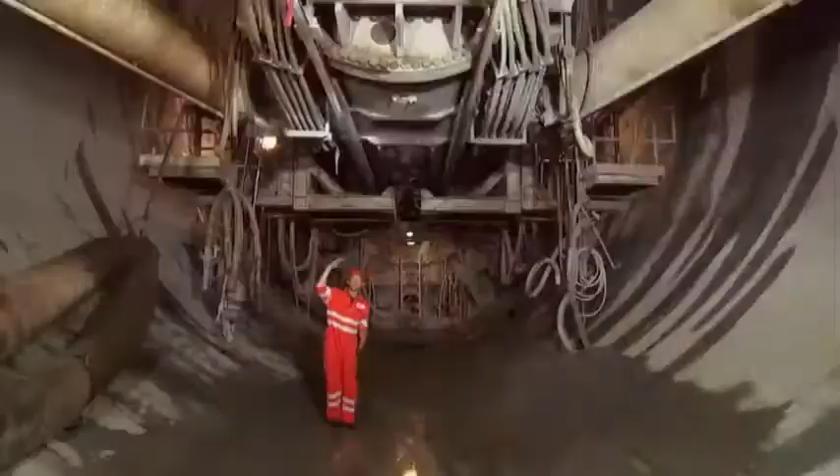Two teams are working through one of the most dangerous geological zones on the planet. If you encounter some bad geology halfway through, it's not like you can go around it. No, you have to go right through. On the one hand, tunneling with one of the biggest machines ever built. A 30-foot tall drill bit that is mining right through the earth.

And on the other, blasting through 7,000 tons of rock each day. All right, so the charge is in, and we're gonna blow the crap out of this wall. After 12 years and 34 miles of digging, they're just 4 months away from the final breakthrough, revolutionizing transit through the Alps forever.

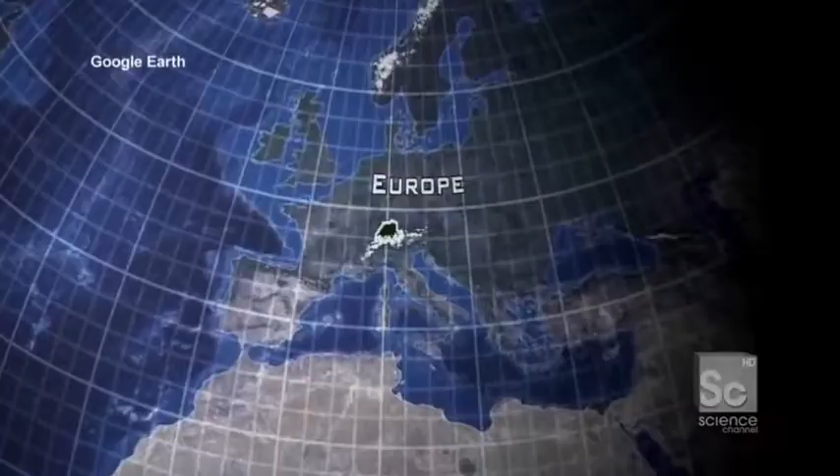I'm in Switzerland, famous for its handcrafted timepieces, milk chocolate, and political neutrality. But more importantly, Switzerland is the geographic epicenter of Western Europe. 2/3 of all freight sent between Northern Europe and Italy is transported through this tiny country, just half the size of the state of Maine. But despite its convenient location, Switzerland is a geological anomaly.

Over 65% of the entire country is covered by the second largest mountain range in the world, the Alps. With soaring peaks over 15,000 feet high, the Alps form a 700-mile-long barrier between northern and southern Europe. And at present, the only way to get from one side of the country to the other is up and over the mountains.

To scale the Alps today, trains climb over 5,000 vertical feet, slowly weaving through sharp curves at just 40 miles an hour, a quarter of their top speed. This steep route also forces trains to operate at half their capacity, despite freight demands growing by 75% each year. With Switzerland becoming the economic conduit between northern and southern Europe, there was an absolute need to find a way to not go over the mountains, but right through them.

Switzerland has launched the most ambitious tunneling project ever attempted, 6,000 feet under the Alps. The Gotthard Base Tunnel will be the longest in the world, stretching 36 miles from one side of the Alps to the other, more than 4 miles longer than the Chunnel connecting England to France.

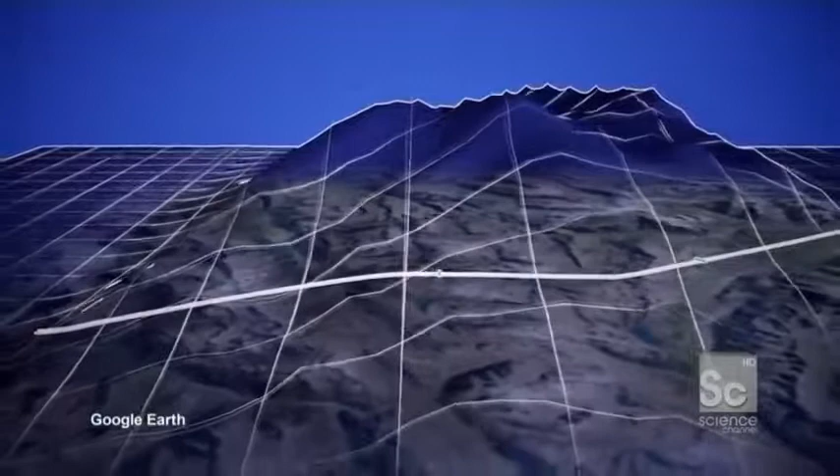When complete, the tunnel will consist of 2 parallel tubes, each 30 feet in diameter. Soon, high-speed trains will cut straight under the base of the Alps for the first time ever, doubling the current freight capacity and dramatically changing transportation through Europe.

I mean, it's more than just making freight move more quickly. Exactly. Alps and mountains are part of the Swiss identity, but it's something that blocks us from the south. And for centuries, people have looked to have a fast way through the Alps. And it's not only about transportation, it's also a cultural exchange.

It brings regions together. To build this revolutionary route, 2,000 workers have excavated 24 million tons of material, enough to build the Great Pyramid in Egypt 5 times over. After 12 years and 34 miles of digging, the tunneling teams have just 2 miles left to go. They'll meet up under the deepest part of the Alps, 6,000 feet below the surface.

And today we're headed 17 miles from the southern entrance, where one team has encountered some of the hardest rock on Earth. Now we're about to begin a 45-minute journey in that train, deep into the tunnel, to the very active edge of where the tunneling is happening. It's kind of freaky, really. Okay. And we're off.

Tell me about where we are in the tunnel relative to where we are in the mountain. We're now basically under the main ridge of the Alps. The pressure from the mountain overhead creates one of the toughest rocks in the world, granite. 6 times harder than concrete, it's what's slowing down the tunneling team.

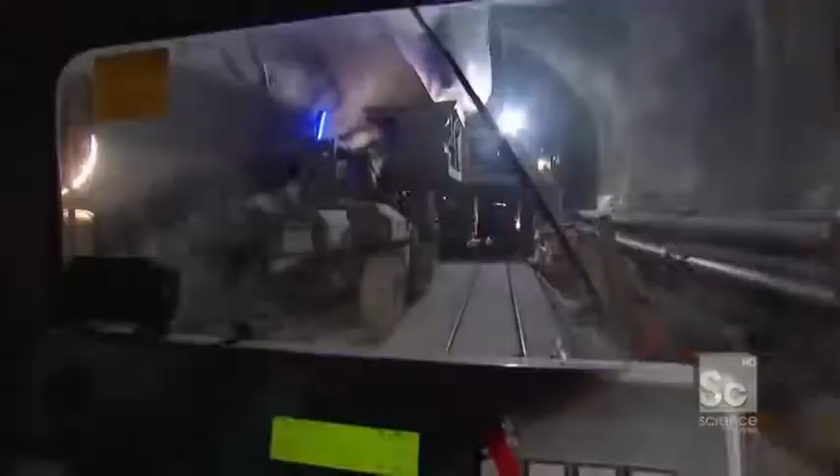No, I mean, we never know where we're going. We're like astronauts. We're putting our foot every day on a rock where no one has ever been before. Well, after about a 45-minute train ride, it's time to go to work. All right, we're here.

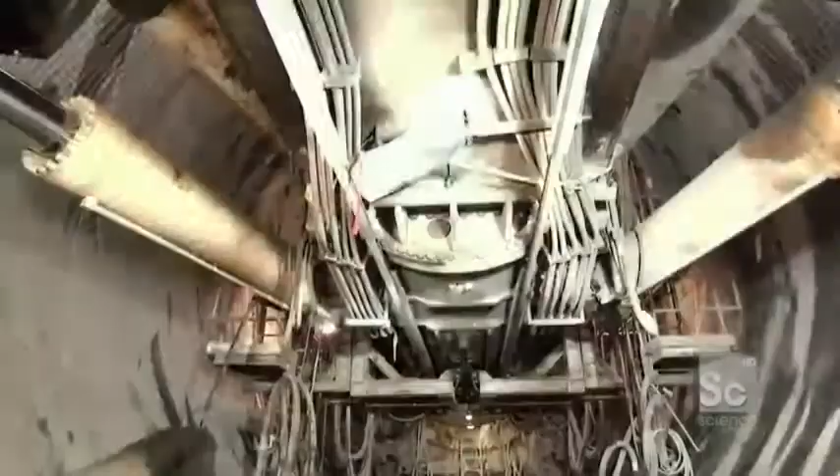So although it's a little bit hard to tell, although it looks like I'm on some big metal rig, this is the TBM. This is the tunnel boring machine. This thing is 1,200 feet long from the back to the front. And essentially, this is what it's all about. A 30-foot tall drill bit that is mining right through the earth.

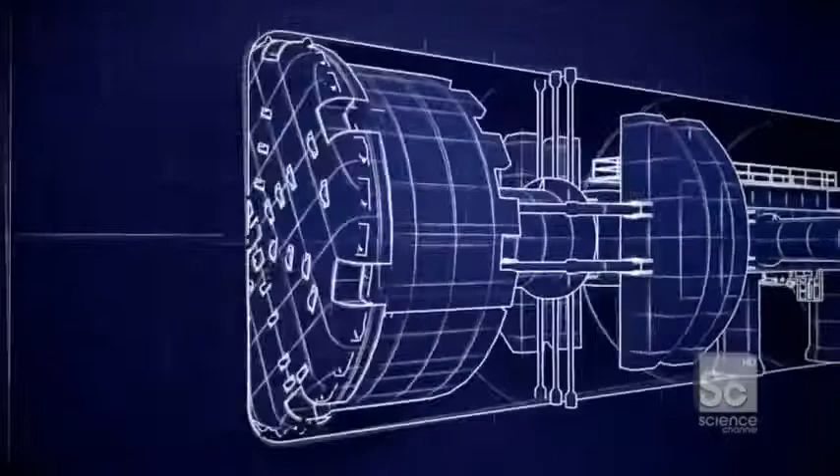One of the biggest machines on the planet, the TBM is a 3,000-ton drill as long as 4 football fields. It bores through the mountain with a 30-foot tall rotating cutter head that pushes against the tunnel face, crushing the rock, advancing the tunnel an average of 90 feet a day.

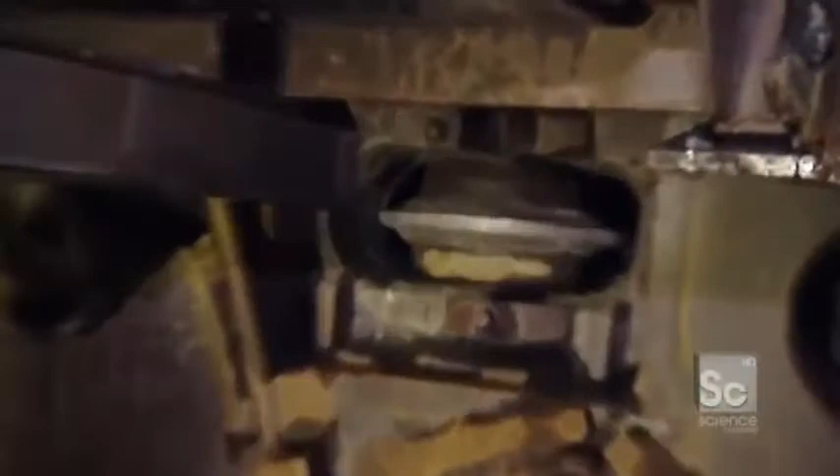All right, so now I'm actually inside the chamber, directly behind the cutter head. And if you look right over here, those are the cutters. Those are the actual rotating devices that are making contact, physical contact, with the front of the tunnel. The 66 disc cutters located at the front of this TBM shear off more than 7,000 tons of rock each day. They've been boring through the granite for 18 hours straight, and they've become worn down.

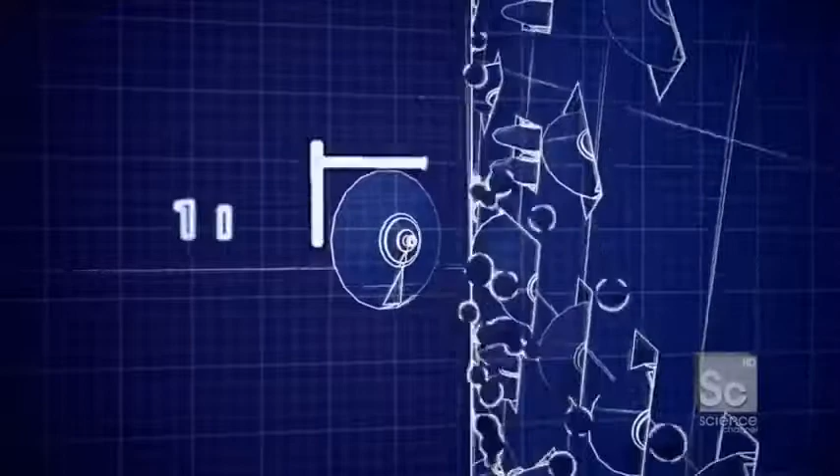Now, if the sharp edges are worn more than an inch without being changed, it can slow the TBM from a maximum of 120 feet a day to just 9. The crew has to repair this battered cutter head before they can continue drilling. The question is, have they been worn out? Do they need to be replaced? And the man who can figure that out is Martin.

Martin, give me some screen. Martin is from Germany, does not speak a lot of English, but we're gonna make this happen because we're both now 6,000 feet under the Alps. There's not really a lot of time to try and have a cultural exchange. So, this is our machine here.

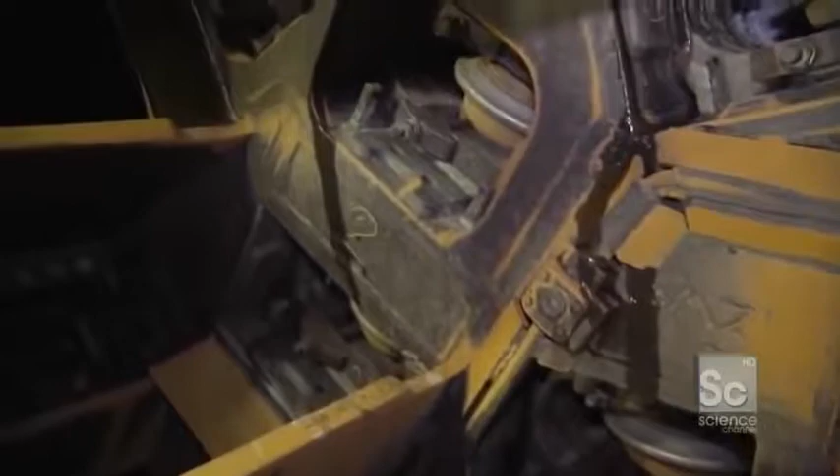Martin uses a specially designed caliper to measure how much of the cutter has been eaten away. If the reading is more than 25 millimeters, then the cutter's been worn down too much and has to be replaced. Myself and Martin are gonna climb into the cutter head, 30 feet tall, measure all 66 cutters, and find out what has to go, what can stay to get this machine back to mining. Not much below me. Good.

All right. The cutter head is as tall as a 3-story building, pushing through the granite with 26 tons of force. Look at him down there. The cutters wear down after less than 12 hours of drilling, 10 times faster than in softer rock.

I'm going in to help, Martin. Stay there, Martin, don't you worry. 16.3. Martin, how are you? Fine. You're good?

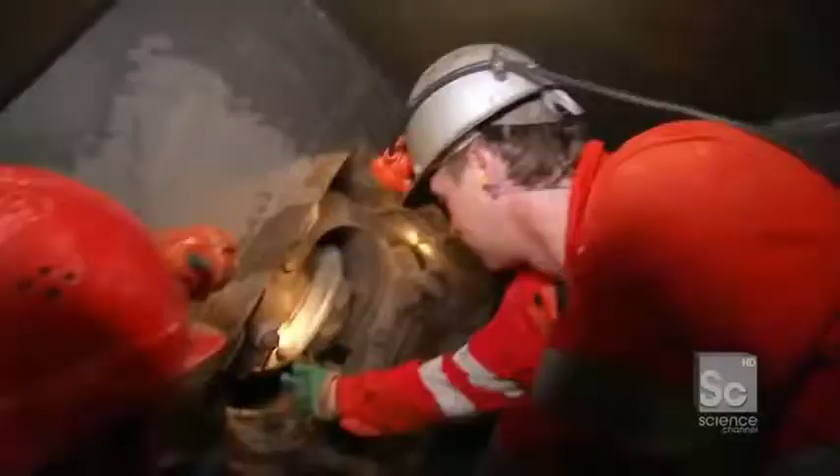We're now in the bottom of the cutter head. I'm actually at the very underside of this 30-foot disc. And what we're here to check out is right there. There's the cutter right there, Martin. So let's measure this cutter head. All right, so now look, as the caliper extends, this is the whole point here. We look at that number, it's 18.3 millimeters, which means this cutter of the 66 can remain. Onto the next cutter. How much? 4.8. 4.81, so we like that.

That one's good. Next. 7.1. 7.1. Also an opportunity for joy. This one's okay. It's pretty good though. 7 is good. Happy. This 20, good. Very good. I guess really when you're dealing with 66 different cutter heads, it's hard to get excited after each and every one. After measuring, we found that 3 of the cutters need to be replaced before the TBM can get back to work.

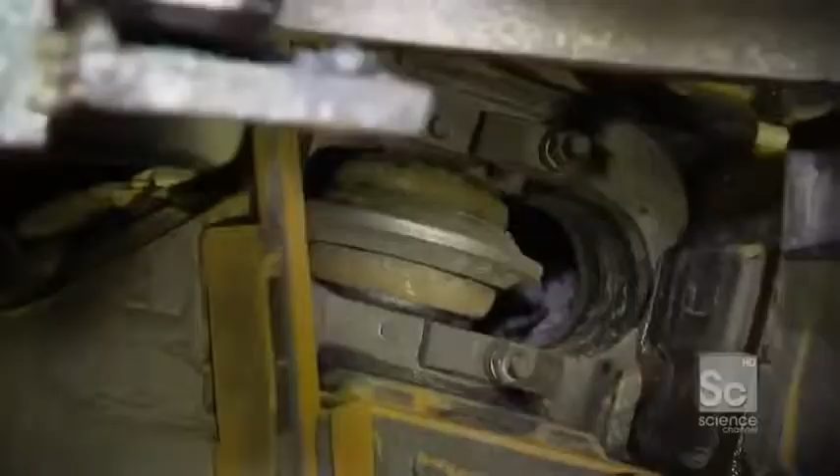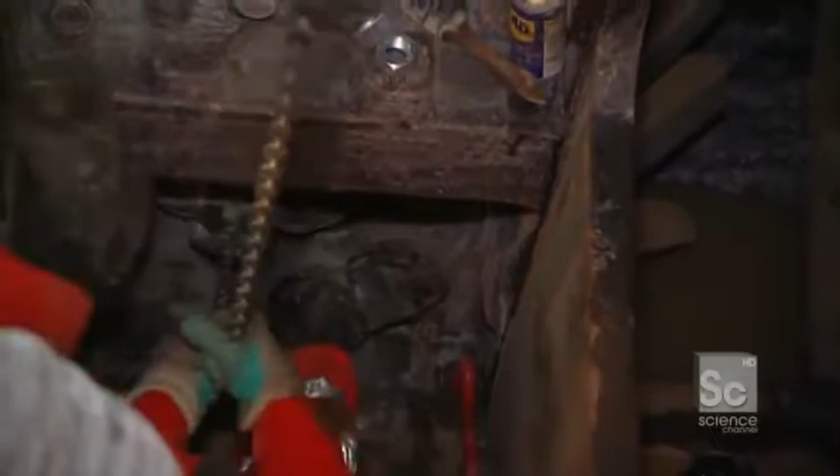So essentially what Martin's doing right now is taking out the old cutter head. Here it is. There it is, he's got it. There goes the old cutter. Over the course of the project, Martin has replaced more than 10,000 cutters. Each one is made of 300 pounds of solid steel, so the crew uses a hydraulic crane to maneuver them into position.

All right, and so this right here is the cutter. You'll notice the steel is at its full length. So this is the new stuff. Gotta get the old stuff out. It's basically like changing a tire. A very heavy tire. You know what I mean? So we swapped the old one out. Next step is bringing the new one.

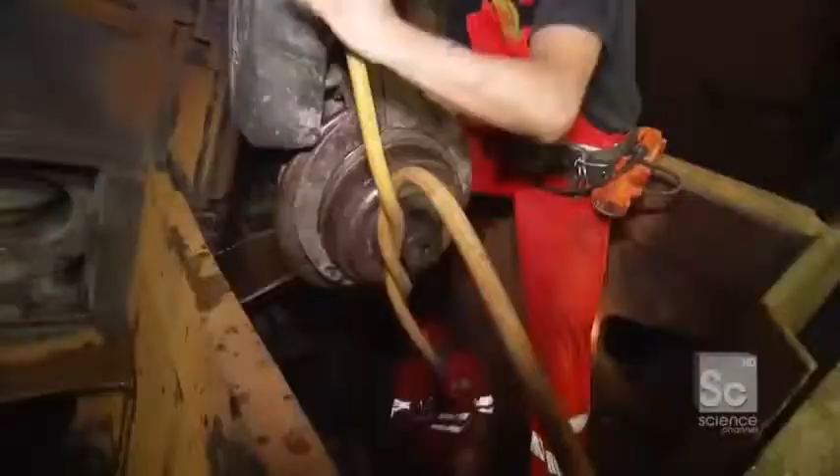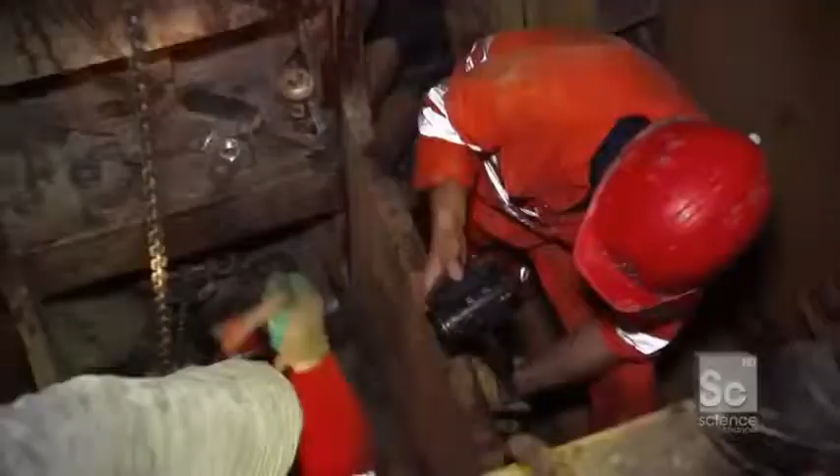And now it's about getting it to fit in the hole, which seems to involve Martin's feet. There it is. Nice. So he's generally gotten into place. He's now using a pry bar to wedge it over. The cutter is specifically designed with just 2 bolts for fast installation, even in awkward locations.

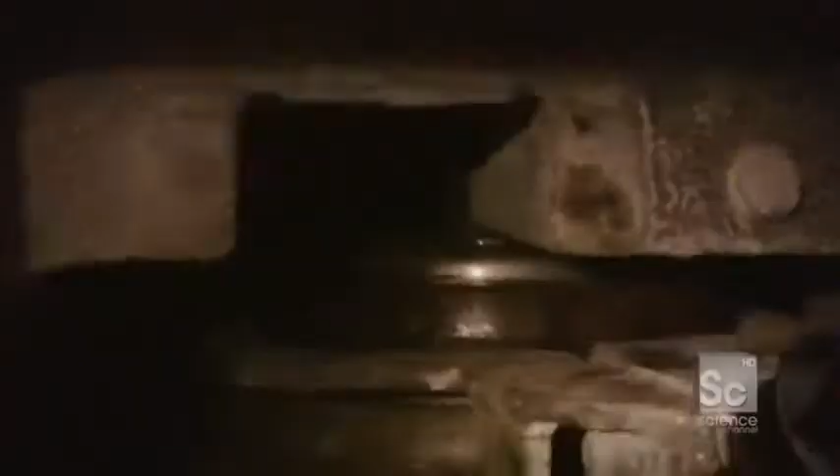Now Martin's shooting. Martin is now fully actually making the show by himself. Nice. Martin's now photographing his own work. Pretty good stuff. Martin, as far as I'm concerned, you shoot it, and then I'll do all the work.

It's incredible that there's 66 of these things, and you can imagine they're getting worn down constantly. And this is what it takes to just change out one cutter in one unfortunately inconvenient location. All right, so the old one was taken out. Yeah? The new one is in. Finished? That's finished. You did good. You did good. You're a fast man.

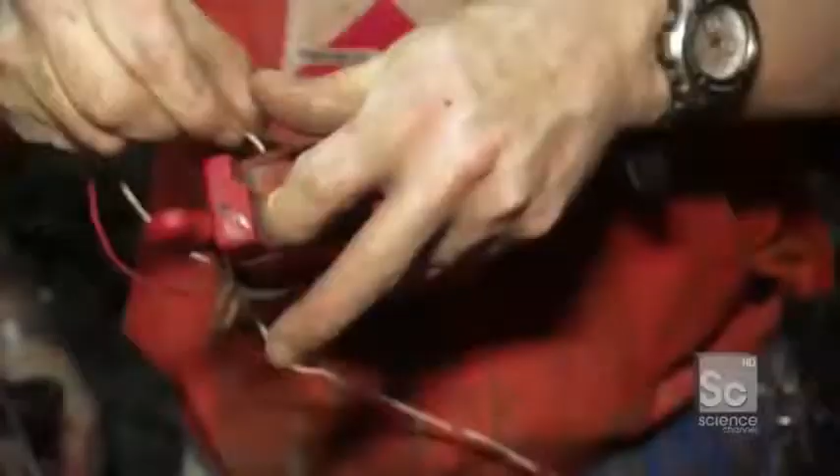And now, thanks to his nimble hands and sort of perspicacity, this cutter head is ready to get back to work and start building this tunnel again. Coming up, using 1,000 pounds of explosives. This is like full on, should I cut the red wire or the white wire situation? to blast through one of the toughest mountains on Earth.

The Swiss are known for being incredibly precise. Whether it's their handcrafted timepieces or their famous train system, which, by the way, I can personally tell you, departs and arrives exactly when they say it will. And they're going to need that level of accuracy because the tunnel they're building is not just the longest in the world, but it also has to accommodate some of the fastest trains ever built.

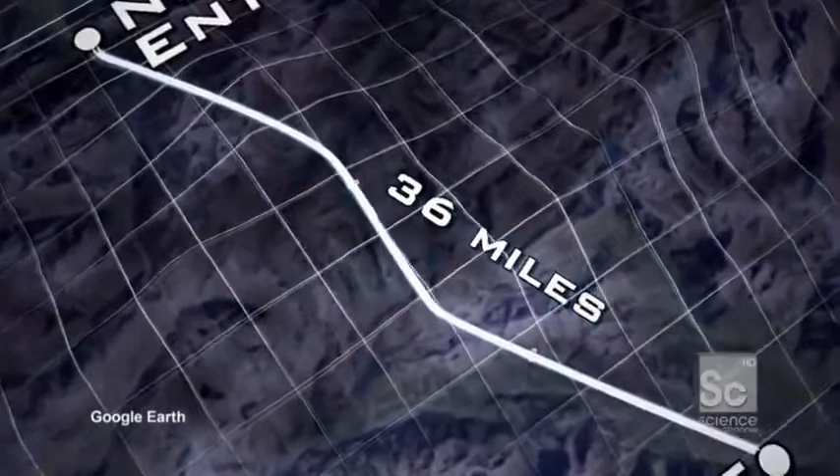Trains will pass through the Gotthard Tunnel at over 150 miles an hour. And at these speeds, even slight curves could cause a derailment. For tunneling teams on either side, this means digging a direct route through 36 miles of rock and meeting at an exact point 6,000 feet under the Alps. I mean, how accurate do you need to be? We have a tolerance of 12 centimeters, which is this much, that we can use to meet.

It's like a bow and an arrow, and you don't see the target, but you still have to be right in the target, right in the middle point. It's incredibly close, and you're shooting an arrow essentially blindly over a trajectory of miles. Well, it's about 1.5 miles still left, yes. And what I find to be so amazing is that you have a set beginning point, you have a set end point. If you encounter some bad geology halfway through, it's not like you can go around it. No, you have to go right through, and that's the main goal of this tunnel. You cannot change the geology.

Ideally, 2 tunnel boring machines would work towards each other, meeting in the middle. But on the north end of the tunnel, the drilling team has hit a patch of soft rock with fault lines. If they bore straight through, it could crush the TBM. So they had to resort to an older method of tunneling. So of the 36-mile-long tunnel, 90% of it is drilled by using a TBM, a tunnel boring machine, that can bore through as much as 75 feet each and every day. But for the area where I'm standing in right now, this 10% section, there are so many fault lines, it's too dangerous to use a TBM. So instead, they're taking it old school and drilling and blasting.

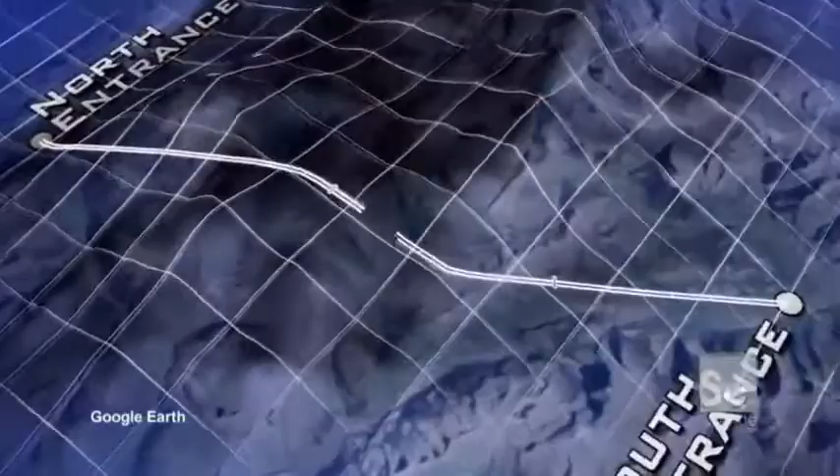Blasting away the rock is 10 times slower than using the TBM, but it's the only solution that'll work in this volatile area. The mountain's enormous pressure creates a squeezing effect, shrinking the tunnel's diameter by almost 3 feet, making it too small for future trains. Now, to prevent this, they're blasting a 3-foot wider diameter tunnel, allowing the rock to naturally squeeze down to the right size, matching the other side.

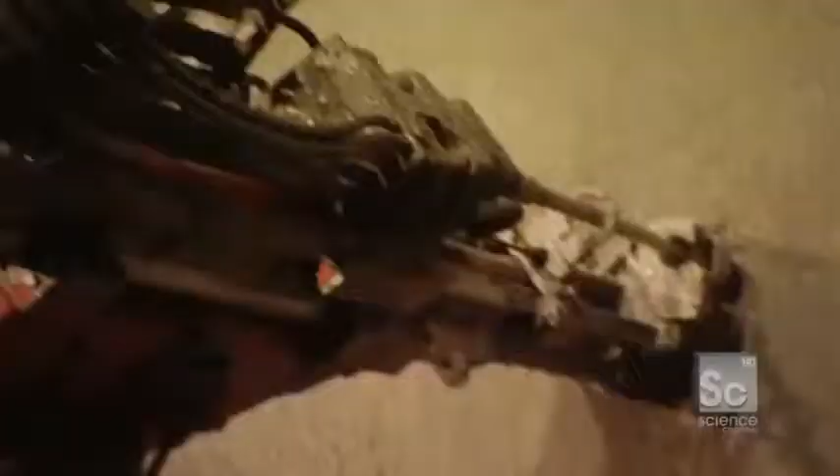So this thing is called a 3-boom Tamrock. Essentially, 3 different drill bits that can put as many as 120 holes into that wall. These holes are filled with ammonium nitrate, a liquid explosive that blasts away the rock, advancing the tunnel 9 feet at a time. Coming up.

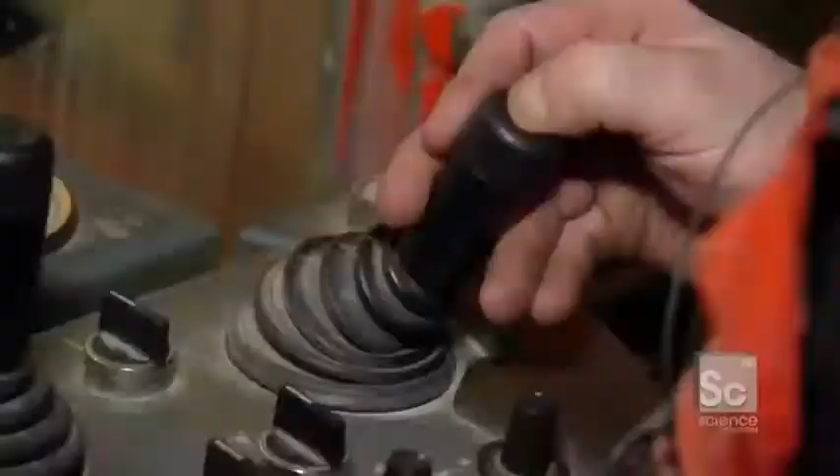Okay, so now I'm inside the cab of the 3-boom Tamrock, and it's this thing and this man right here, they're actually driving this thing and supporting this rock bit. How are you doing? You're smoking. That's good.

We're in a confined space in a tunnel with very little air, so... You do? Yeah, you're both smoking.

So actually, if you look here at the computer screen, it sort of sums up what we're up to. This is a cross-section of the tunnel right in front of us, and the goal is to locate 120 holes on this space and drill those holes, filling each one with explosives so we can push that wall out

and grow the tunnel. Are you smoking back there? This guy loves to smoke.

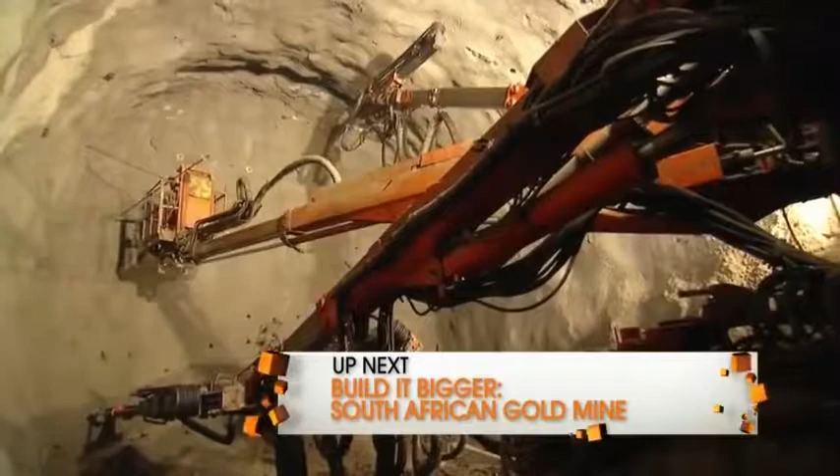To precisely control the diameter of the tunnel, a surveyor pinpoints the location of each hole within an inch, evenly distributing them across the rock face. All right, so at this point, we're almost done. Almost all of the 120 holes have been drilled, and the next step is to load them, or in other words, fill them with liquid explosives.

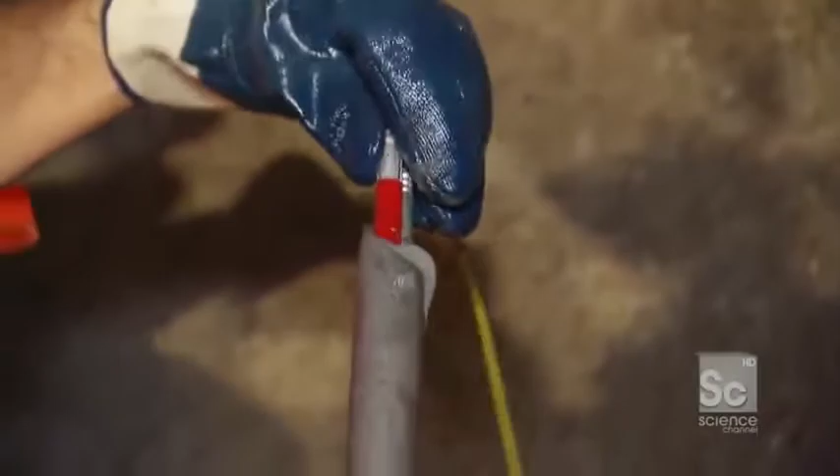So you can see the charge right here, right? It's essentially a small little bomb in my hand, and I'm going to stick this in the very tip of my hole, right? We're actually going to shoot this hole with the liquid explosives and push this charge into the very back. Therefore, when the blast goes off, this charge will actually accelerate the blast, loosen more rock, and get us those 9 feet we need.

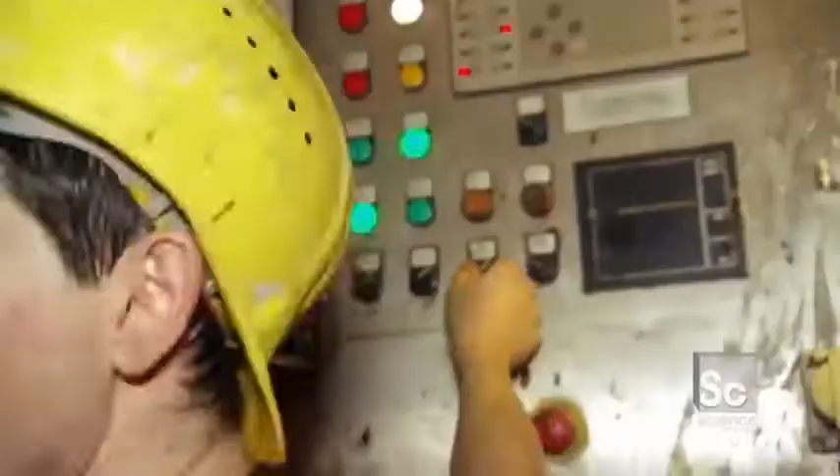Okay, ready? The charge, the tip of my spear. Push it in, push it in. Get it in. I'm in, 9 feet, I'm in. Bring in the juice, and now, right now, he flips the switch. Switch is flipped. Now, in this hole, look at that. There she is. All right, so the charge is in. We're gonna blow the crap out of this wall. Keep going, all right, okay, here we go.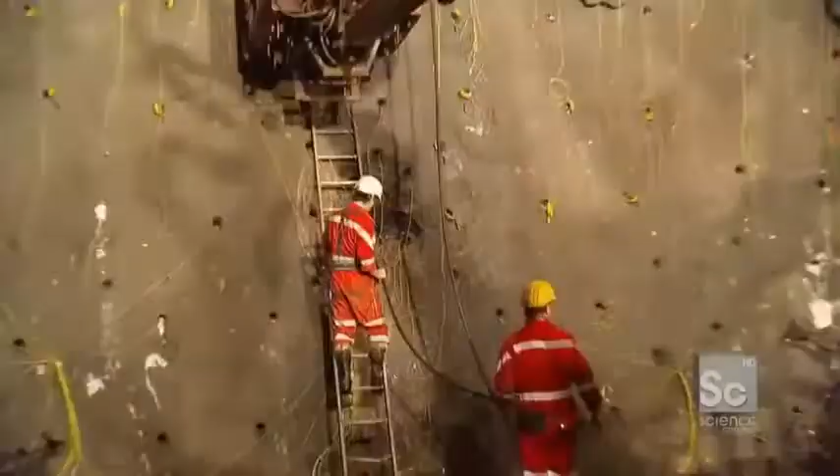The charges are tied together and timed within milliseconds for maximum control, starting at the center and radiating out. The last charges to explode are at the bottom of the face, loosening up the pile of debris, making it easier to remove.

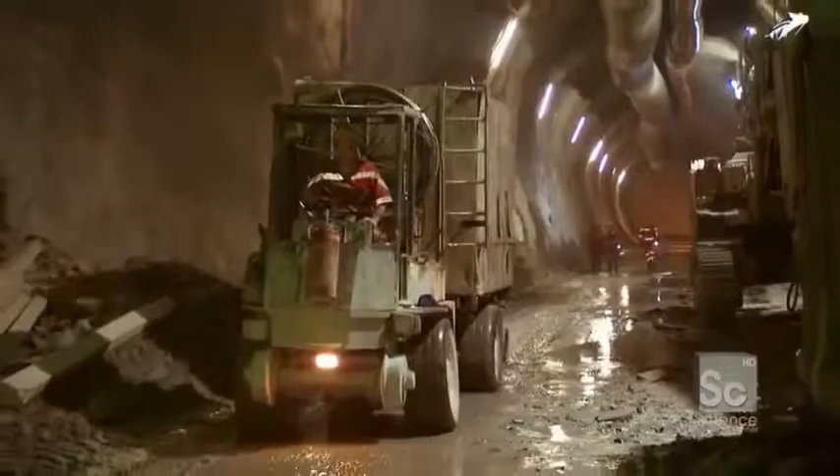The last thing to do is to take, if you look right here, the fuse that's connected to every single one of the holes, connect that to this right here, all the explosives getting tied together with this last piece of, well, yellow electrical tape. You would have thought it a little bit more sophisticated at this point, but that's it. With the fuse connected, the explosives are live. The team retreats 900 feet up the tunnel to clear the blast radius.

When the multi-million-dollar equipment starts to get backed out of the way, you know it's time to go, so we're there. All the holes are filled, charges are connected, we are done, everyone's evacuating. We're ready to blow this thing up. All right, so we're gonna hide behind this steel container right here. Now, there should be enough protection, but I want to make this clear. The blast is happening right over there in a straight line.

Okay, that's it down there. That's the end of the wall. So we're not around a corner. We're not hiding far away. There are just over 100 blasts to go before the tunnel is done. And the honor of setting them off goes to the construction company's largest shareholders.

And as we speak, in his hand are the 2 wires that came all the way from that wall, physically dragged all the way there, right? He's got the wires there. He's tying them into the detonator, one to the next. This is like full-on, should I cut the red wire or the white wire situation. There's about 14 different people from the company to my left here.

Wow. Grande. Well, there they go. Apparently what's required to set off the blast here is that you have to have a substantial amount of stock in the company. I have none, so I didn't get to blow it up. He did a fantastic job. The blast went off, all is well. Potentially the rock wall has been pushed back 9 feet, and I'm gonna start buying stock in this company, so in a couple of years, if I stay focused, I too can blow something up.

The blast puts off superheated ammonia gas. So we have to wait 30 minutes for it to clear before we can check the damage. There's still a lot of residue in the air, so your eyes do burn. Even with the gas mask, it's really hard to breathe. You can feel the ammonia in the air. Well, what do you think? Tip-top. Tip-top. Good? The man is happy. It'll take the remainder of the day to shuttle all 6,000 tons of debris 5 miles out of the tunnel.

Well, look at this. Where I'm standing right here, 15 minutes ago, was a solid wall of tunnel. And now, I'm standing on the residue. The tunnel has been pushed back by 9 additional feet. And they're going to spend the rest of the day pulling out the muck and getting ready for the next blast.

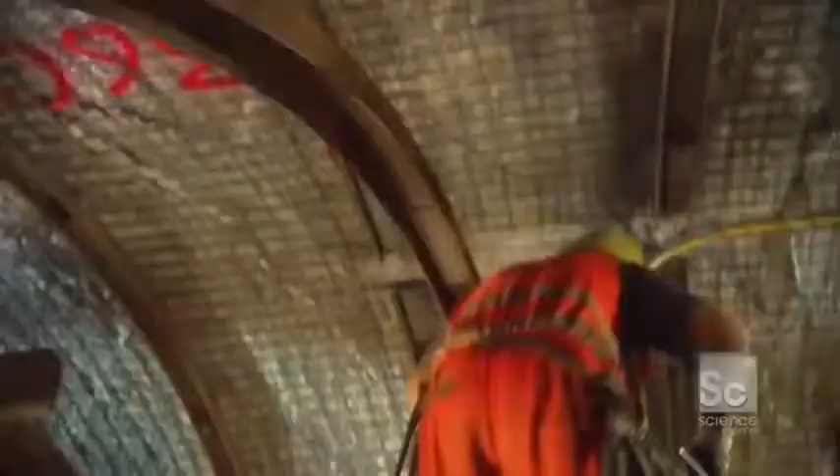Coming up, preventing a catastrophic cave-in with a one-of-a-kind technology. Yeah, it can collapse and fall down, and that's a great problem. That's a big problem. Yeah.

So I'm now driving through the Swiss Alps, one of the largest mountain ranges in the world. And it's complicated. I'm climbing over 5,000 vertical feet, and to do that, you have to negotiate these incredible curves, one hairpin turn after the next. For more than 800 years, people have been searching for a faster route through the Alps, but it just wasn't possible until now. Because to build a tunnel straight through these mountains, engineers had to overcome some of the most complex geological conditions in the world.

Generally speaking, land masses are formed by a series of earthen deposits, one on top of the next, for millions of years. This creates a horizontal stratification of layers. Now, as you can imagine, this is great for tunneling. The TBM goes in on one side and has the same consistent rock type all the way through the tunnel. However, here in Switzerland, things happened a bit differently.

When the tectonic plates made contact, they actually folded upwards, creating a series of vertical stratifications, which make an amazing mountain range, but also make a lot of different geological types. So when the TBM goes into the mountain, it hits one type, and then a second type, and a third, and a fourth, and a fifth. Multiple different problems requiring multiple different solutions.

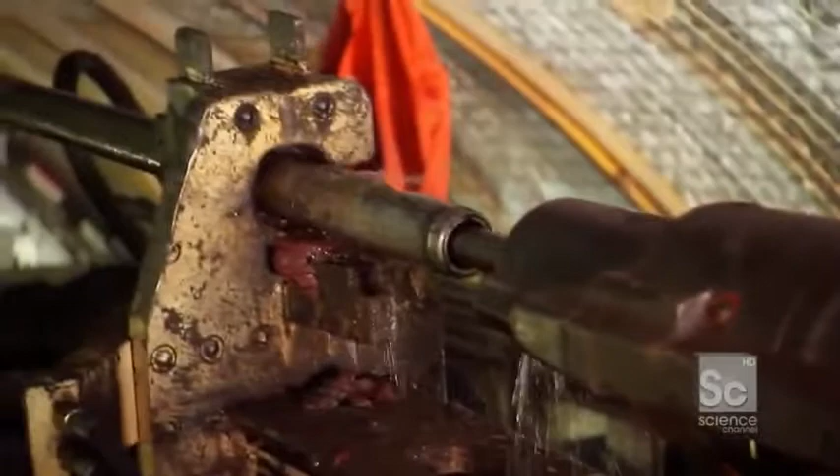The drill literally feels its way through the rock 360 feet in front of the TBM to find out if it's hard or soft. If the rock is too soft, there's a high chance it can cave in while drilling, burying the $30 million TBM and the men working on it thousands of feet below the Alps. So for example, if the drill steel goes right into the rock very quickly, you know it's soft. Exactly. But if the drill steel has to fight its way through, you know it's very hard. Yes.

Yes, we stay also here with our eyes of geologists, not only with digital data, to look at the rods, how they behave. You have to actually see, feel, understand the rock. Yes. Because in reality, you're still working blind. I mean, you never actually see the rock, only the way in which things interact with the rock. Exactly. It's easier today to look at the surface of the moon than to know exactly what we have 10 meters inside this rock mass.

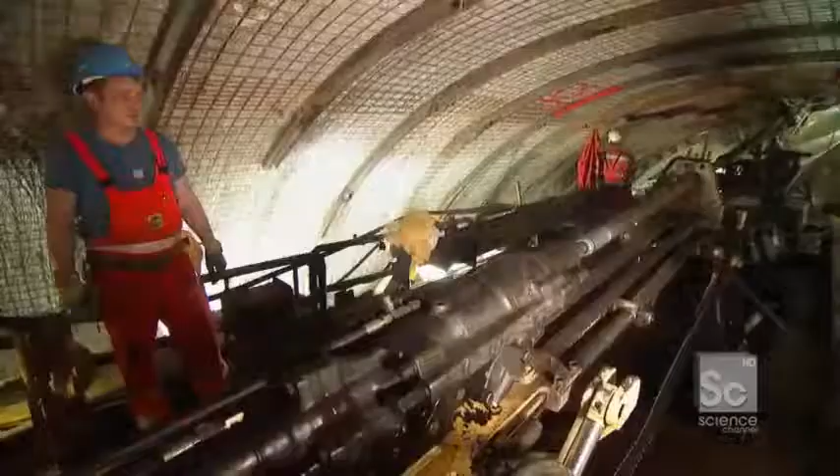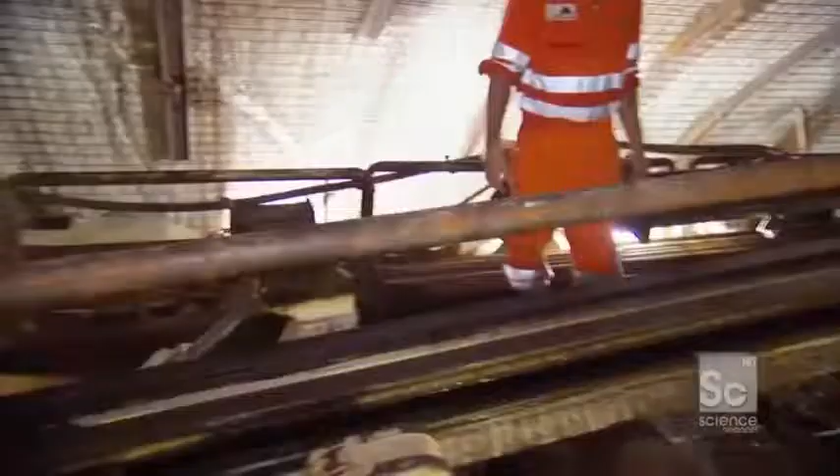To probe 360 feet into solid rock, the drill is made up of 36 10-foot-long sections joined end to end. So as you can see, what we're going to do is clasp that on, tighten it up, lock it in. So in doing so, we've added a new piece of steel, creating one long 360-foot probing stick that tells us what's happening out in front of the TBM.

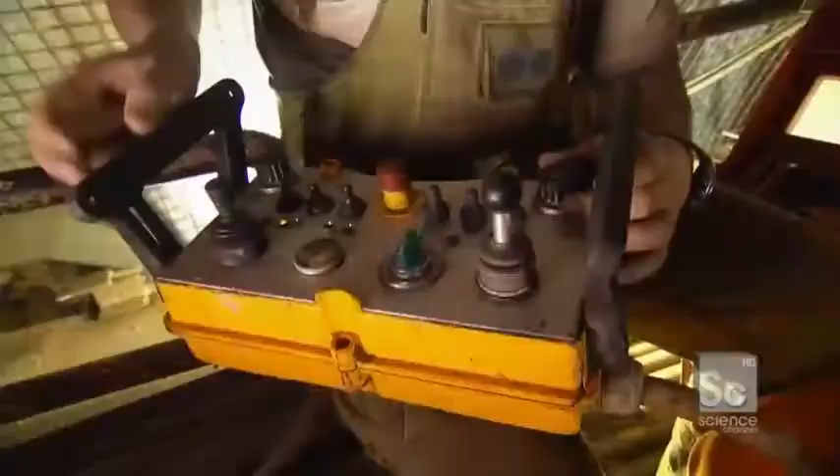So the man who's actually controlling the drill and the force he applies to each subsequent piece of steel is right here. Ralph. Guten Tag. Guten Tag. I'm Danny. Oh, yeah. Nice to meet you. My English is bad, sorry. My German is terrible. Okay. I started and you... Perfect.

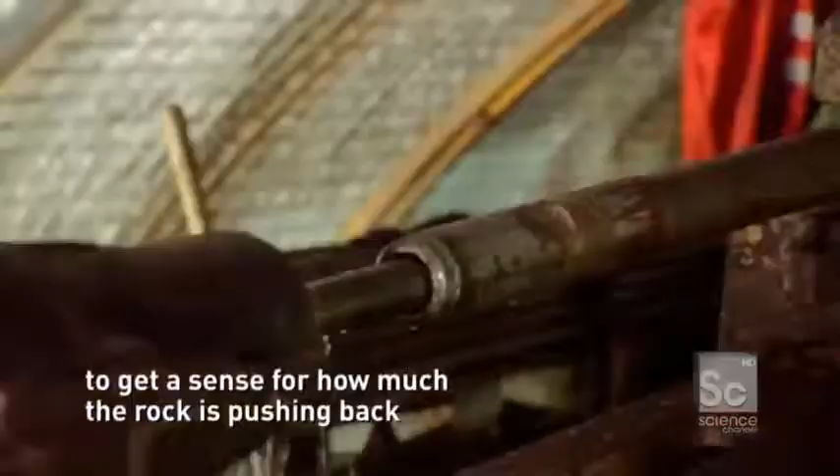So Ralph just turned the drill on. He's going really slowly right now to get a sense for how much the rock is pushing back. As he takes his readings, he slowly increases the power. Or lets me drive. A computer records how much force it takes for the drill to cut through the rock, giving geologists a sense of what's in front of the TBM.

About 100 feet in, the drill hit good, hard granite, but it also revealed that the first 100 feet were much softer than expected. If it's too dangerous to drill through, they'll have to stop the TBM and manually blast through the danger zone, adding 5 months and $10 million to the schedule.

So tell me about what was discovered during the exploratory drilling. Yeah, through the drilling, we find out some very, very soft material. And so now we're very nervous of the situation. If this were soft rock, what could happen? Yeah, it can collapse and fall down, and that's a great problem. That's a big problem. Yeah.

To find out if the TBM can safely move through this soft rock, geologists are doing a rare secondary exploration using an endoscopic camera to peer into the mountain. And you don't do this very often. No, but in the moment we have a very special situation, so we use this camera thing. It's just the second time or third time ever. And so what do you hope to see by putting the camera in there? We hope to see just a small band of the soft thing, so that would be good, but we don't know.

Same thing, yeah. The camera shows the physical structure of the rock, information the drilling can't provide. So this is it right here. So now that's amazing. So essentially, they have an endoscopic camera attached to the end of this blue thing, and they're going to stick this camera in a pre-drilled hole about 150 feet out that will tell them exactly, by eye, what is happening in the rock. And I've always wanted to do this.

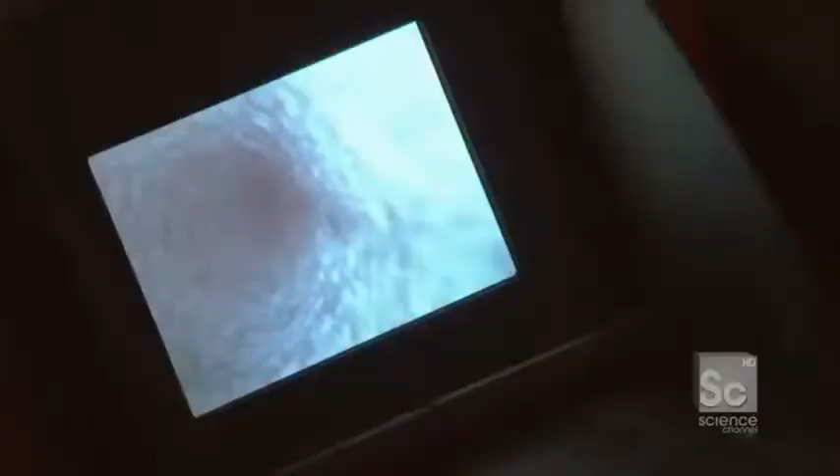Geologists look at the pattern and colors of the rock for clues about its structural integrity. If you look at that screen right now, what you're able to see is exactly what geological condition we're going to experience 150 feet in front of where we are right now. This is like that scene in Star Wars when the monster came out at the...

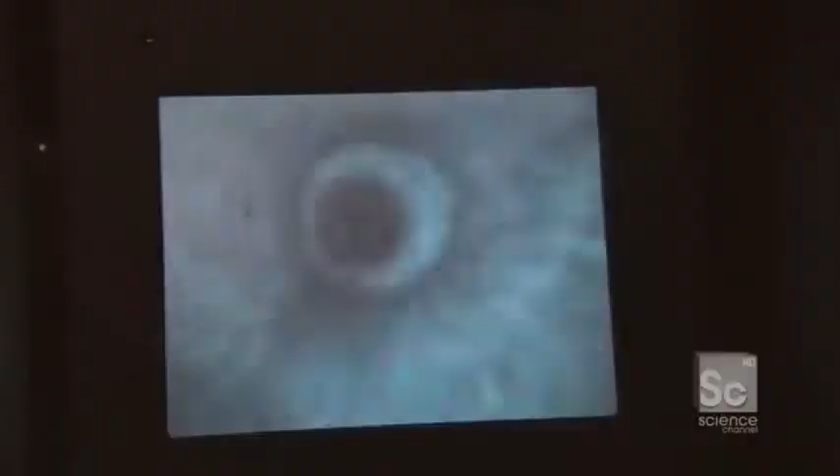That's amazing. So when you look at this image, as a geologist, what are you taking away from that image? Yeah, what I see is the stone from the side, and you can see the structure, and you can see that it is the same structure as the stone we have in the back of us. So when you look up, that same kind of black and gray, the same lines you're starting to see just around that edge. Like right there, that white fissure right there. That is nice news. That's good news.

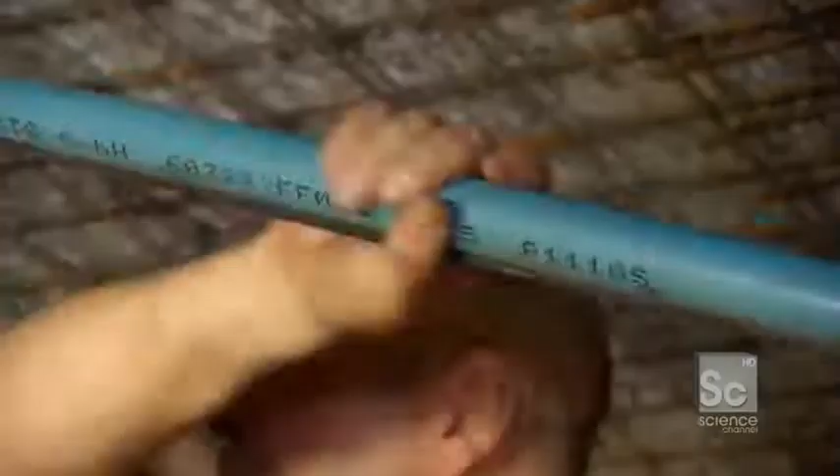That's good news, yeah. The footage shows that despite its softness, the rock is structurally sound, and the TBM can safely bore through it to get to the hard rock. So if this rock is good, that means that rock out there is also good. Yeah, absolutely. So as a geologist, does that make you smile? Yeah. That's a good rock. That's good rock.

Coming up, preventing a major train derailment with a drainage system designed to stop thousands of gallons of water. Can't be the easiest way to do this. But first, who holds the record for the longest tunnel in the world? The answer after the break.

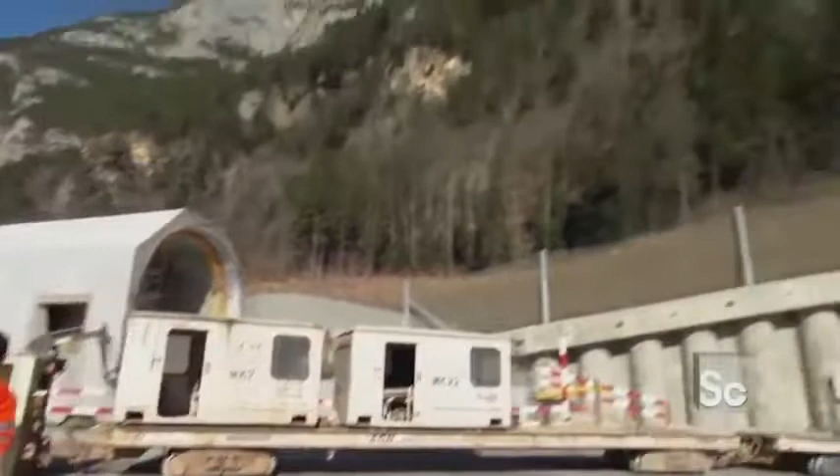To be in Switzerland. Amongst the beautiful snow-capped mountains, breathing in this incredible, fresh mountain air. This is about the last I'm gonna get of it, because today, I'm going into the mouth of the tunnel, where it is dark, it is hot, and it's buried deep under the Alps. The Gotthard Base Tunnel gets its name because it cuts through the base of the Alps more than a mile below the peaks. Now, while this depth creates a fast, flat route, it also puts the tunnel in danger, not only from the enormous pressure from above, but also from the large quantity of water inside the mountain.

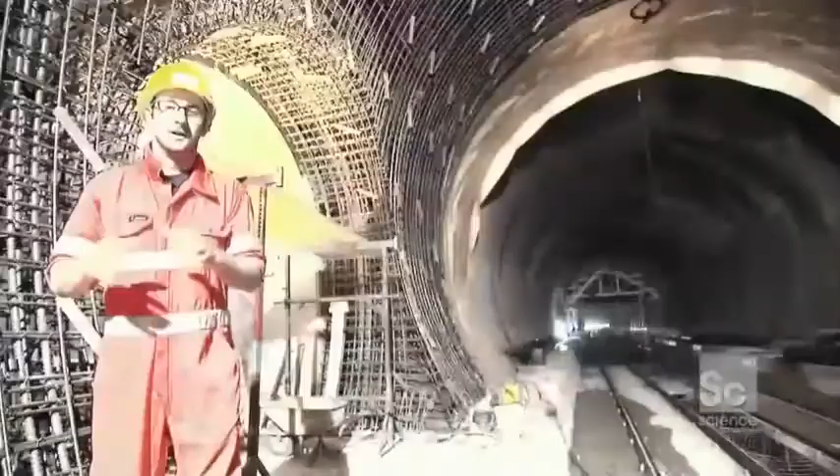The Swiss Alps, if you think about it, are a waterlogged mountain range. There are lakes and streams up top, as well as snow-capped peaks. And when that snow melts, all that water will slowly percolate through the mountain and ultimately come down into the tunnel, rusting the steel and eroding the concrete. Over 1,000 gallons of water seep into the tunnel every second. If it's not contained, that water could be incredibly dangerous, eating away at the rock supports, potentially collapsing the tunnel, or rusting the high-speed rails, causing a major derailment.

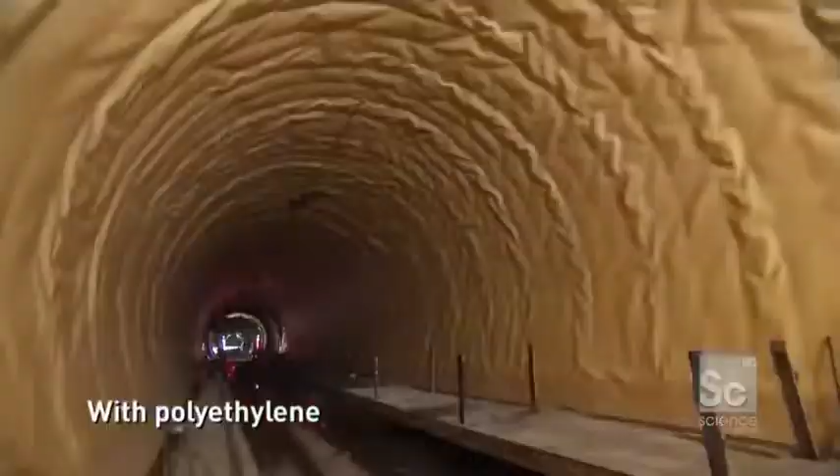The challenge is to find a way to take this 36-mile-long hole and make it waterproof. Gunther, the challenge is the Alps are full of water. Yes. Lots of water. I know. You know this. I know this, yes. How do we keep the water from going into the tunnel and rotting out the steel and rusting out the railroad tracks? With polyethylene, this is absolute security. This is what keeps it dry. No chance to come water out.

No chance. This tunnel has one of the most advanced tunnel drainage systems ever made, hidden behind the tunnel's concrete structural wall. A thin sheet of yellow polyethylene actually creates the watertight seal. Under that, a thicker layer of plastic protects the waterproofing from the tunnel's rough walls. Finally, small spacers create a half-inch gap from the rock face, allowing water to flow down into a drainage pipe. And the key to the entire watertight system, installing it without any punctures or seams.

And so to make sure that it's solid with no seams or holes or edges, we're going to unwrap this around the entire circumference. Yes. One piece. This is no problem. All the way around. All the way around, we found this. The layers are made from 100-foot-long sheets of seamless plastic. In total, they'll use more than 50,000 sheets to seal the entire tunnel, enough to reach from New York to Boston and back again.

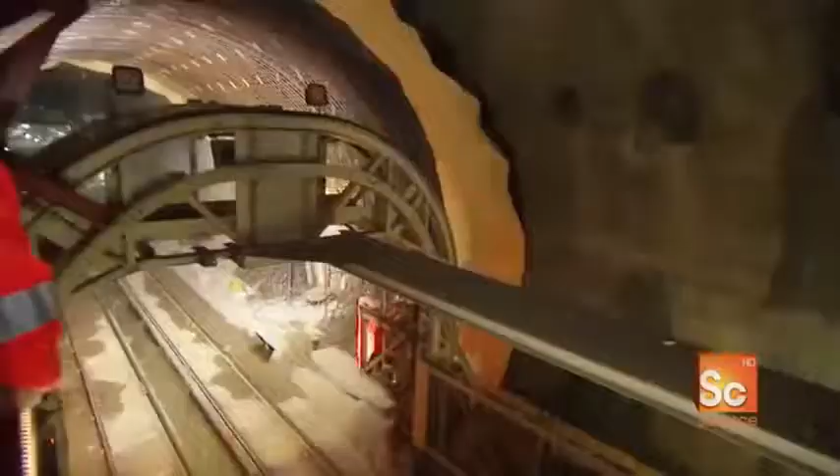Now, one of the oddest things about building a tunnel is that you're working with an upside-down circle, right? And you have to cover every single inch of it. So rather than go up, build some scaffolding, get higher with more scaffolding, they've created this rig that moves 360 degrees around and lets us unfurl these sheets of drainage mat in one single shot. Oh, coming down. Look out. Sorry. The drainage mat is secured to the wall of the tunnel with gray plastic caps.

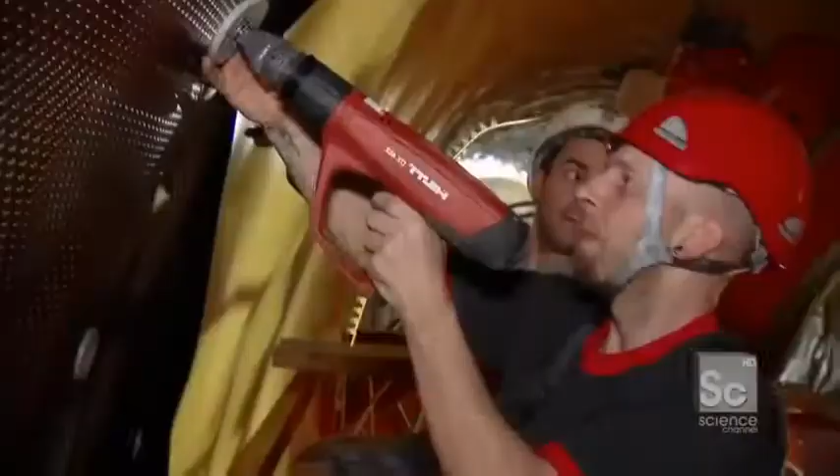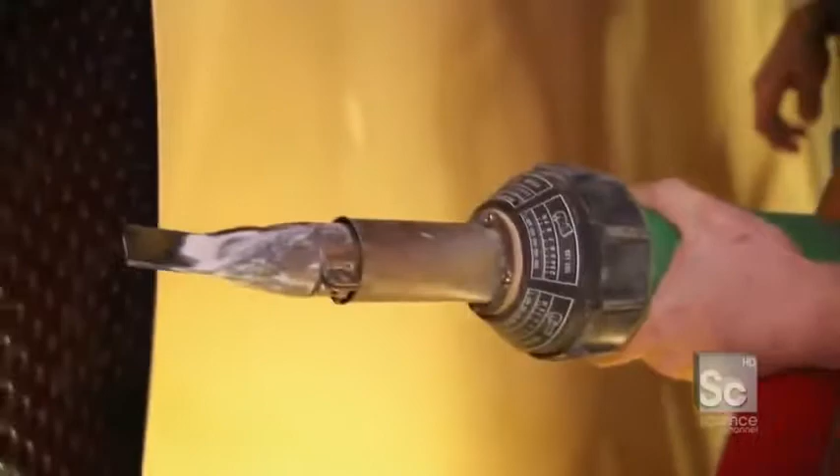There it is. They do more than just attach the drainage mat to the tunnel. These caps are made from the same polyethylene as the yellow waterproofing, and when heated, the plastic bonds together, seamlessly attaching the waterproofing to the tunnel walls. So what Philip's doing right now is taking a heat torch, putting it on the back of the plastic, and melting just a little bit, so there's no tape, there's no nails. He's literally melting the two pieces to form one solid bond. The heat gun, called a hot air welder, melts the plastic at 600 degrees.

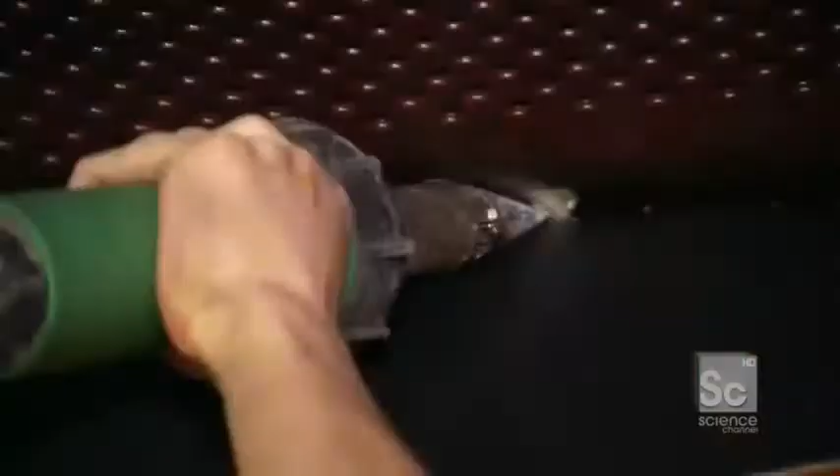Going up top now, huh? Yeah, give me the heat. Give me the heat. So essentially, he just put 600 degrees behind me, and now I'm pushing the rubber against it to melt the two, one to the next, and it is burning the crap out of my hand. And we don't stop. We keep moving. We're doing this in one shot. We're moving. We're moving. Ow.

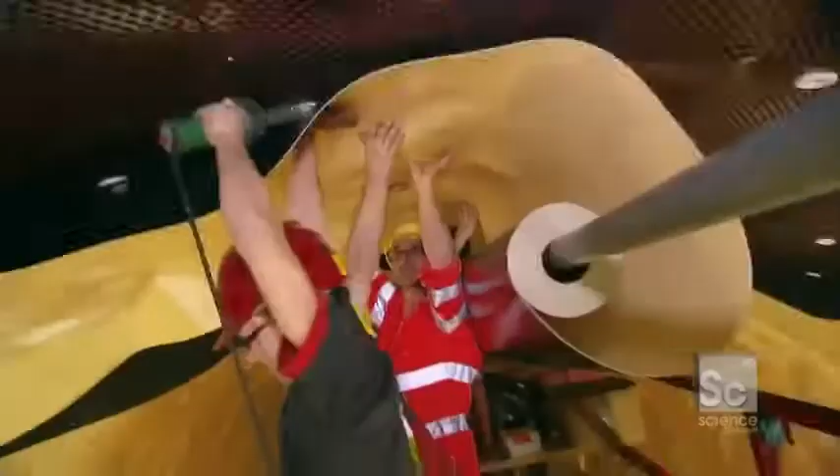Oh no! You gotta be kidding me! Why don't you guys wear gloves? This can't be the easiest way to do this. That's just the easiest way. Believe me.

Günther, what's going on? You're going nuts out here. We've taken one piece, wrapped around the entire circumference of the tunnel to guarantee absolutely no water gets in. But to do that, it is absolutely madness. Just pure madness. Günther's team can install up to 10 sheets a day. And with just 2.5 miles done, it's going to take them 2 more years to waterproof the tunnel.

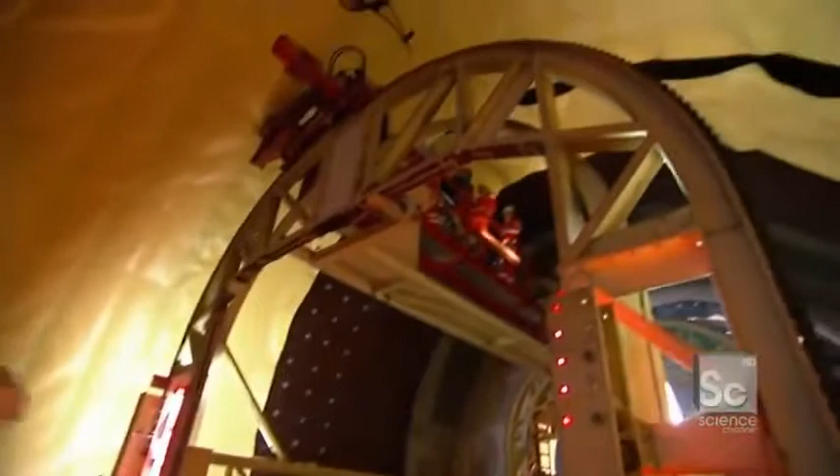So now that we've done this, essentially, this section of the tunnel, the longest tunnel in the world, has just become watertight. No chance. No chance. I work here, no chance. You did it. Yes, I did. Günther said no water's coming in. If you believe anyone on this site, and there are some very reputable people, I would believe Günther. Günther. Thank you. Thank you, sir.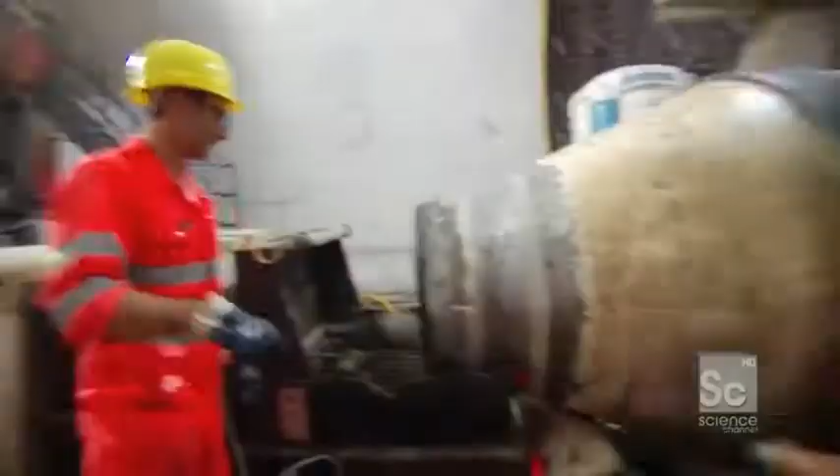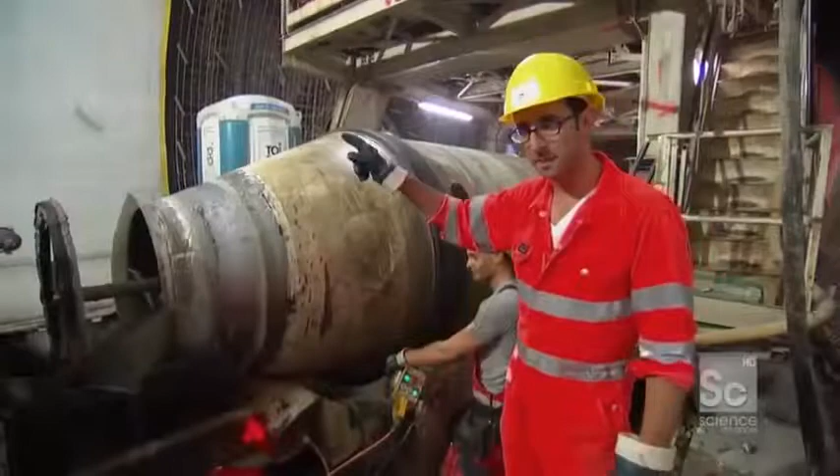All right, here it comes, like that. As he turns that wheel, it's opening up. This concrete is coming out, and we're gonna fill the entire circumference of this tunnel, 30 straight feet of it, and that begins right now with this concrete. Now the concrete is flowing. You hear that, each pump. It's pushing the concrete through this tube, up top, and down into the formwork. I'm gonna head up now, where they're pouring the concrete.

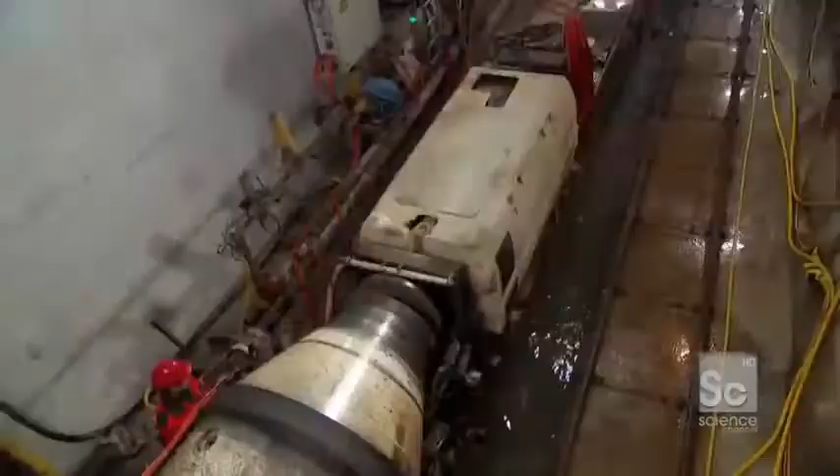The concrete team's biggest challenge is maintaining a uniform density around the whole circumference. If the wet concrete is allowed to naturally settle at the bottom of the mold, the tunnel won't distribute the stresses from the mountain evenly, cracking and caving in. To avoid this, the mold is poured 9 feet at a time and allowed to set for 15 minutes before the next pour, making it strong enough to hold up under subsequent layers.

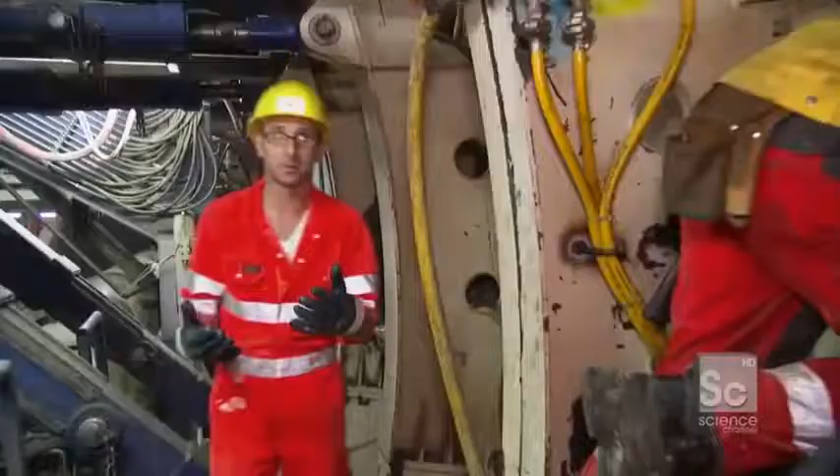But if the concrete pours down, you have no access, except for this. They developed a series of windows, or almost portholes, that open up and allow the guys to get inside and actually vibrate the concrete as it slowly rises around both sides of the cylinder. Can I get in there? Can I look? Yeah? Okay. So where I am right now is actually what will become a concrete wall. This is the outer layer. This is the inner layer of the formwork. And as you can see, the concrete is getting poured in and will slowly rise, filling this 1-foot cavity all around the tunnel.

This 30-foot section will require over 20,000 gallons of concrete, making a wall strong enough to stand up to the enormous pressure from the mountain above. But keep in mind, that was 30 feet. We have 35 more miles to go to make the longest tunnel ever attempted.

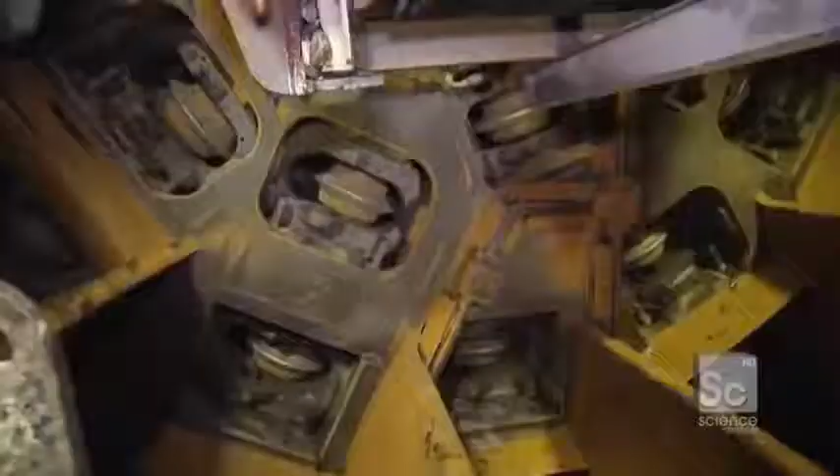Coming up, starting up one of the biggest machines in the world for the final push through the mountain. So if you see this, you're happy. Super. That's super. Super cool. Super.

The Gotthard Mountain Pass is one of Europe's most important trade routes. And since the 13th century, engineers have been struggling to find a faster way through. People always tried to improve, actually, ways through the Alps. First, it was just horses with freight on their back. Then they built a small street. Then, actually, the boom came with the railroad. Even 100 years ago, the desire would have been, if possible, to bore right through the Alps, have a straight shot. Exactly. It's just that in the 19th century, the people didn't have the technology to build such long tunnels.

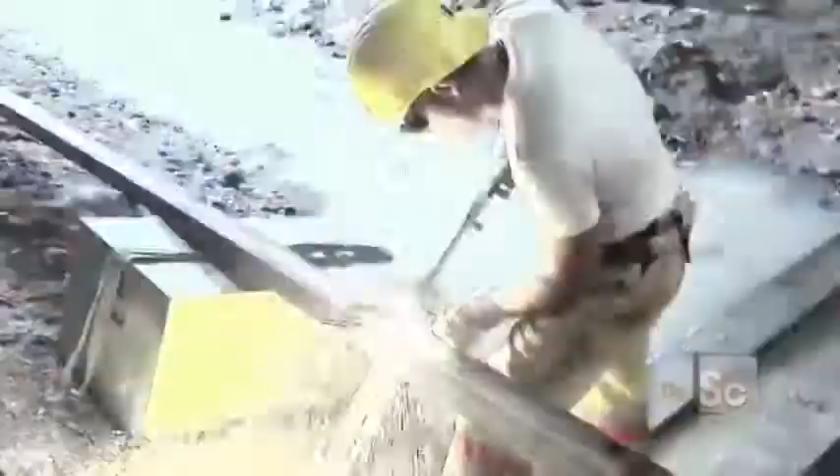The technology finally caught up 12 years ago when Switzerland broke ground with their first tunnel boring machine. Now, they're just 4 months away from completing the first high-speed route through the Alps. But the TBM has got to stay on course with surgical precision to ensure a clean breakthrough. 17 miles inside the tunnel, the team is gearing up for the final 2-mile push through the mountain.

Get to ride in the front of the train with who I think to be possibly the happiest train driver I've ever met. You're Felice. You're driving the train. Felice is ready. He is happy and enthusiastic about the endeavor. I am too. Not as happy as him. I don't think anybody is. But we're ready to go. Come on, let's do this. Let's do this. I love it. Great. All right, we're going in.

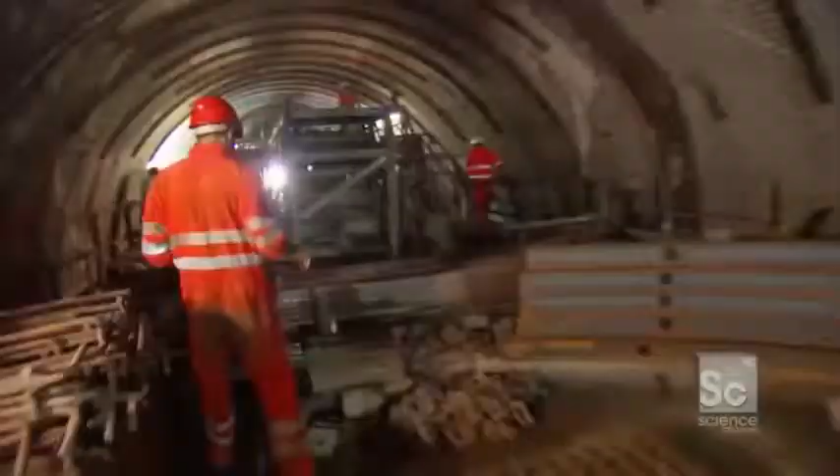After 16 hours of intensive geological exploration of a dangerous section of soft rock, the TBM team is finally ready to begin drilling. Are we here? Yeah. End of the line. In these last 2 miles, the TBM team is facing fault lines and intense pressures from the mountains overhead, making it especially challenging for the driver to both stay on course and avoid a collapse.

Hello, sir. Hello. How are you? Fine. I'm Danny. Yannick. Yannick, are you driving the TBM? Yeah. All of this madness out here, all this driving, and all right here. Yeah. We're advancing right now. So finally, after some time, some very complicated geology, Yannick behind the ostensible wheel of the TBM is smiling because the TBM is mining. We're pushing against the open rock face, and rock is coming out of the cutter head and out of the tunnel. So if you see this, you're happy. Super. That's super. Super cool.

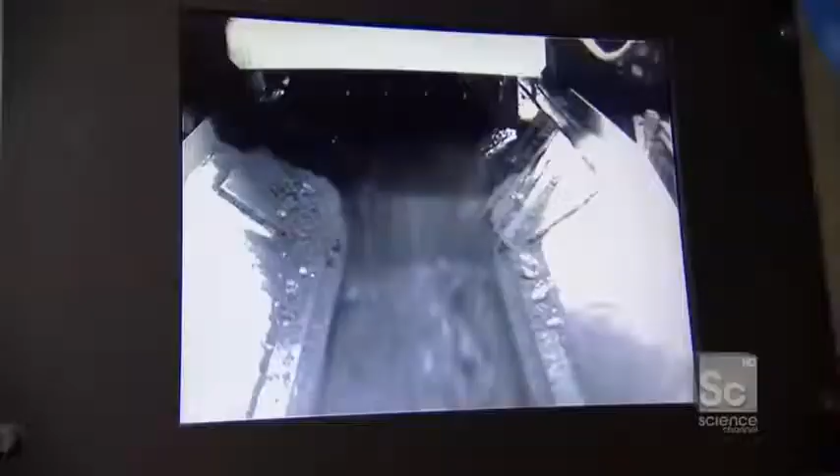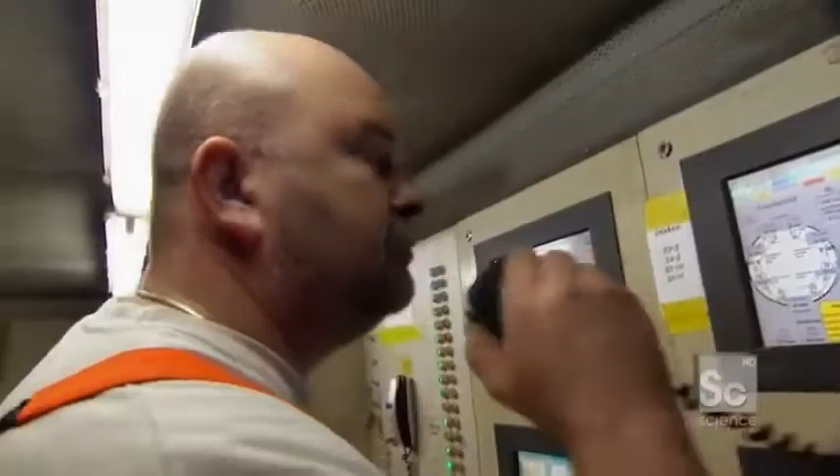As Yannick drives, a team installs metal support beams to keep the tunnel from collapsing. They've got to stay in constant contact to keep the TBM at just the right speed. If the machine moves too quickly, the crew won't be able to put up enough rock supports, leaving the tunnel dangerously weak. This is how fast we're moving. This is millimeter. So right now, as we speak, we are moving 53 millimeters per minute. 53 millimeters, so it's 5 centimeters per minute. So that's like a very small amount of distance in a minute. This moves very slowly. Very slowly.

As he controls the speed, moving less than 2 inches a minute, Yannick also plots the course to meet the drilling team on the other side of the tunnel. A deviation of just 0.05 of an inch, about the thickness of a CD, could cause a misalignment of more than 2 feet by the time they break through. To realign the tunnel, they'd have to shave off tons of material from the existing walls, changing its shape and compromising its integrity. So as we speak, we are angling a little bit to the left and a little bit up.

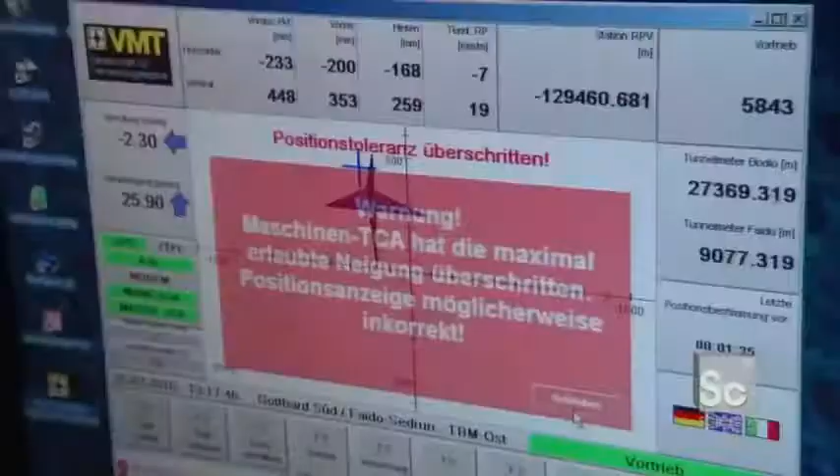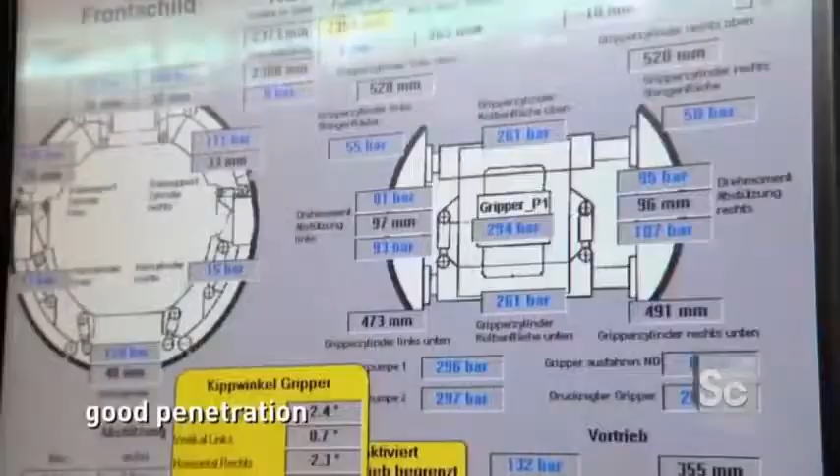During the 9-hour shift, Yannick checks and adjusts the TBM's heading more than 100 times based on real-time GPS readings. He controls the horizontal and vertical path with the TBM's 2 massive grippers. They also propel the TBM forward, advancing it 6 feet with each stroke. This moment is perfect. Good power, good penetration. It's perfect. We have good power, good penetration, good travel speed, beautiful looking rock. What more do you need? Other than maybe not being 6,000 feet under the Alps. But barring that, we are finally in good shape.

After a half-century of planning, Switzerland is just 5 years away from completing the longest tunnel in the world. And if all goes well, high-speed travel through the Alps will be possible for the very first time. Switzerland is famous for the Alps. It is what's defined the image of the nation for hundreds of years. But at the same time, these mountains have also transformed the country into a barrier, disconnecting it from the rest of Europe. So the historical challenge has always been to find a way to connect to other countries while contending with this enormous geological impediment.

And it's been an 80-year dream to not just get over the Alps, but find a way through them. And after 20 years of design and construction, they have just about made this dream a reality. And if you come to Zurich in 2016, you can hop on a train and be in northern Italy in just 2.5 hours. And all the while, travel right through one of Mother Nature's biggest obstacles.